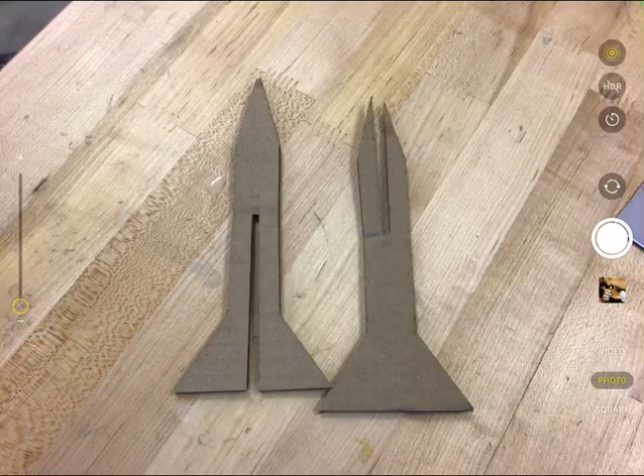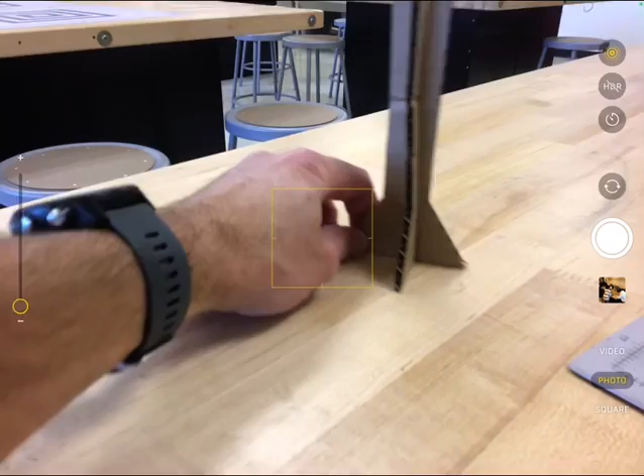All right, we are going to make these rocket pieces that fit together like so. Let's see if I can hold this up. The two pieces, so the slot on one stops where the slot on the other begins. And they insert together. So this is a technique just to help you learn how to create slotted pieces that connect together. So here we go.

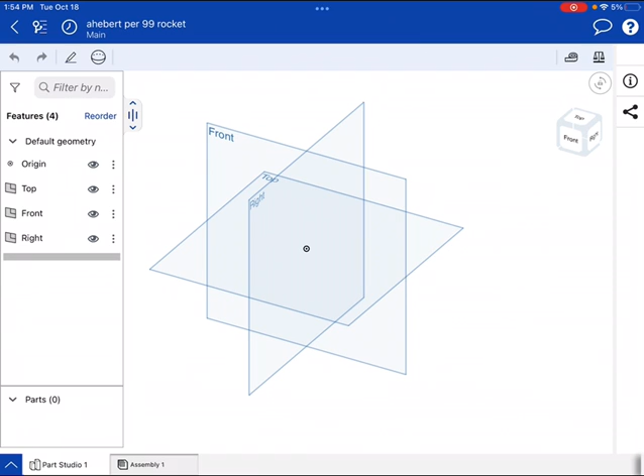All right, I'm gonna create a file. Always put your name first and last, period, and then the name of the file, rocket. I'm gonna start by sketching on the front plane with the line tool. Now, I'm gonna do something to make your life a little easier. Right next to the line tool, I'm toggling on and off the dashed line. So press and hold, watch what happens.

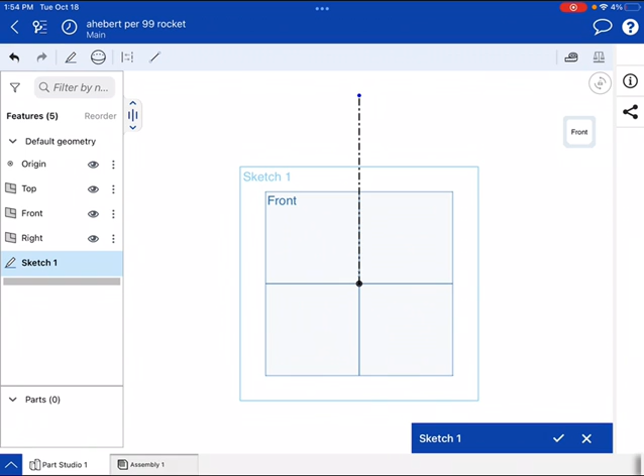I'm gonna snap to the center and go straight up. And I get a dashed line, all right? So it's exactly the same thing as drawing a line, but you turn on this little dashed symbol. All right, now nothing is on. So turn off your line tool, turn it back on, and now we're gonna draw the rocket.

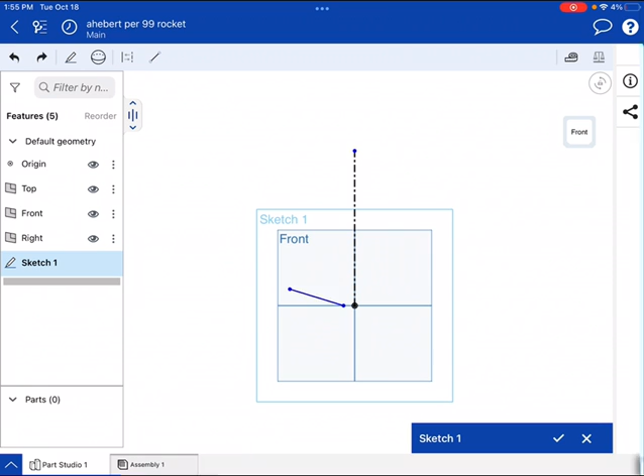But I'm going to start by drawing the rocket with like a gap in the middle. No, let's not do that. Let's actually undo what we just did. Let's turn on the line tool and let's just draw the rocket. So here we go. Now when you draw it, you don't need to worry about it being perfect, but you want it to be approximately correct.

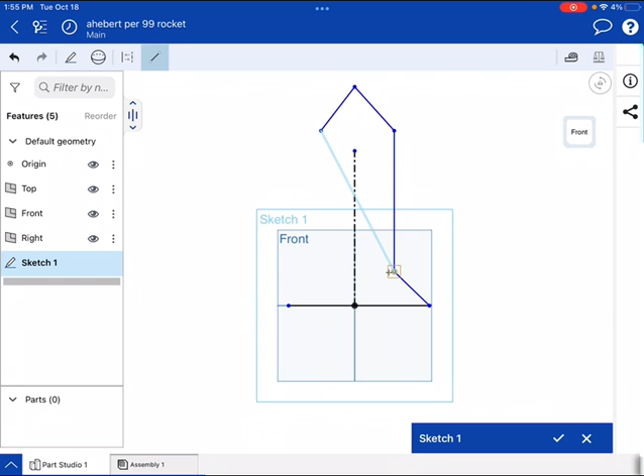All right, now this helps. Look at this, snapping to the middle. That's going to help me not have to dimension that middle point right there. Snapping across here will help me as well, not have to use the horizontal line tool. Snapping across here, if I connect those and drag across, they're already horizontally aligned. And there you go. Now we have to create that slit, right?

Be careful, if the line tool is still on, it's going to want to start drawing from where I left off. Oh, maybe not. Well, anyway, turn on the line tool. I'm going to press and hold, and I'm going to come down here, and I'm going to draw. Oh, look at that, it snapped to the middle. I don't want that. So let's zoom in a lot. Turn on my line tool, press and hold. We don't want it to snap to the middle because we want to draw a slit that straddles the middle, okay? So you're gonna draw it like so.

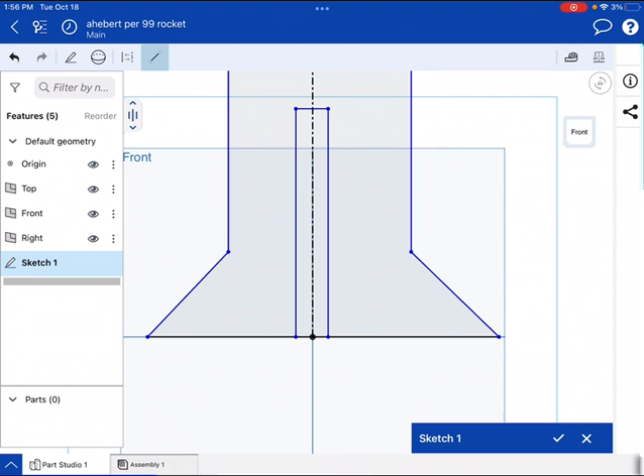There you go. Now I'm gonna turn off my line tool and grab the trim tool, zoom in, press and hold, and delete those little lines. All right, perfect. So we're pretty good to go. If you missed that part when I was using the points to snap to each other, make sure these are horizontally aligned right here. Make sure this point and this point are horizontally aligned.

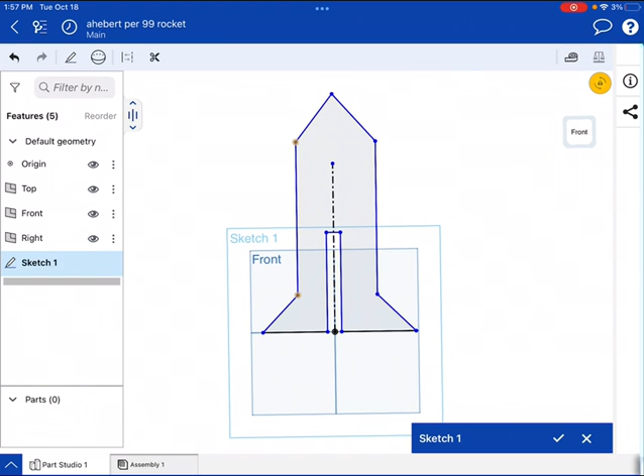And if you didn't draw it straight up and down, make sure these points are vertically aligned, right, on both sides of your rocket. So step one is to draw the shape approximately correct. Step two is to horizontally and vertically align your points. You can also test by dragging. These 2 points are moving together vertically, which means they are horizontally aligned. So you can always test it too.

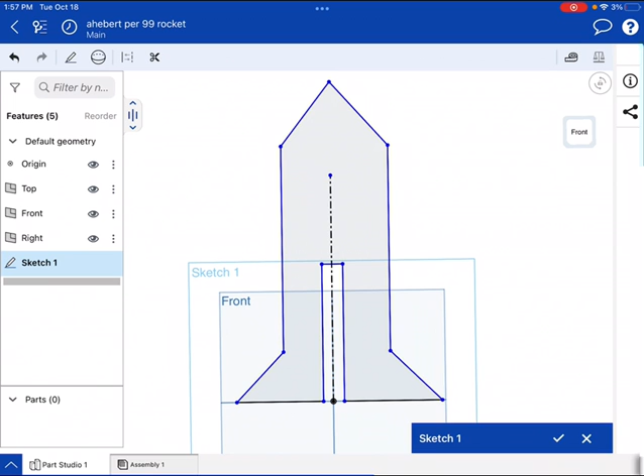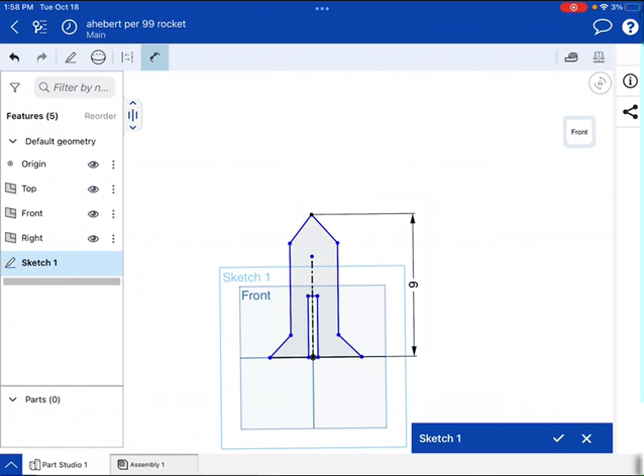All right, so sketch the shape, vertically and horizontally align any points, and then put on your largest dimension. I'm gonna go top to bottom. Now that's diagonal. Put your finger on the number, drag it out until it becomes a vertical dimension. I'm just gonna use 6 inches, check. And that'll shrink everything down. I'm gonna turn off my dimension tool and just zoom in a little bit. All right.

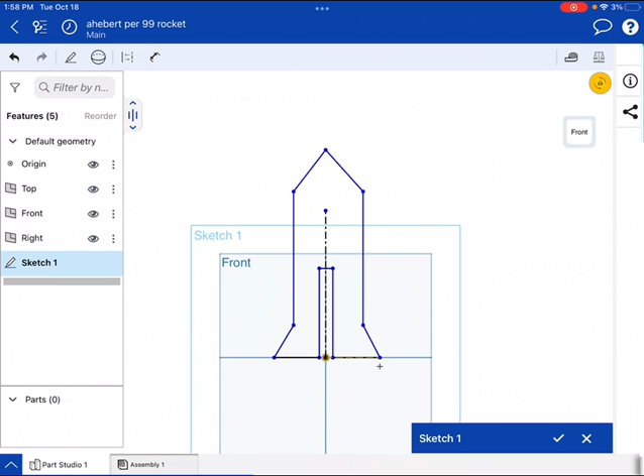If by any chance the tip of your rocket doesn't look like it's in the center, this is what you should do. You should dimension the full width, whatever number you want. I'll use 3 inches, okay? Now that looks really goofy. Looks really goofy, all right? But I should be able to still move things around. There's not a lot of dimensions, right? So I can still move this around till it looks kind of symmetrical. I'll put dimensions on to guarantee it.

So watch this. I turn on my dimension tool, I press and hold, I go from the corner to that line of symmetry right here. And that should be exactly half of 3, okay? Make sure that the tip of your rocket is vertically aligned with the end of that dashed line. They should be vertically aligned. So I'll hit vertical, although I think mine already were vertically aligned. Okay, so that line of symmetry is going to help a lot.

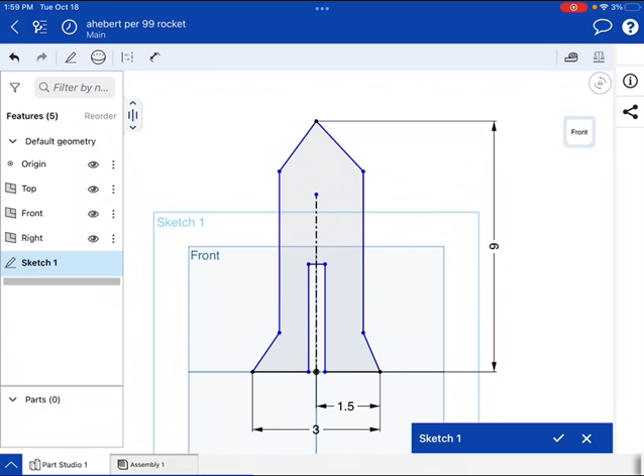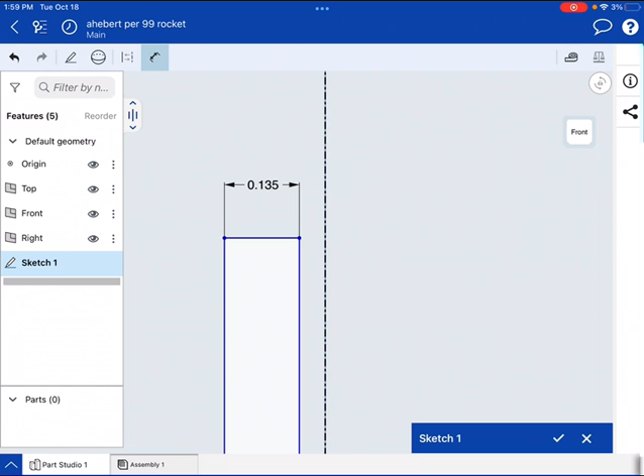Now, the full width of this slot right here, if I just tap on that line, if I select it, the full width of this is only 0.135, 135 thousandths of an inch. That's the thickness of cardboard. But I want it to be symmetrical about that line. I'm going to turn off my tool. You can actually move the line if you tap it and drag it. Some of you might have trouble doing that just because of the sensitivity of your screen. Okay, you might have to delete the lines and redraw them so that they go across the top.

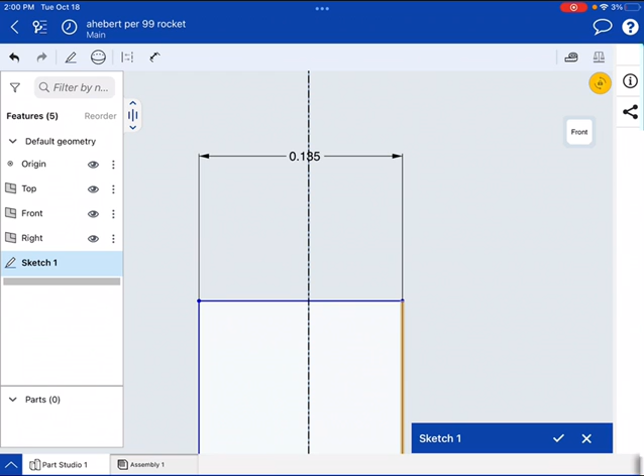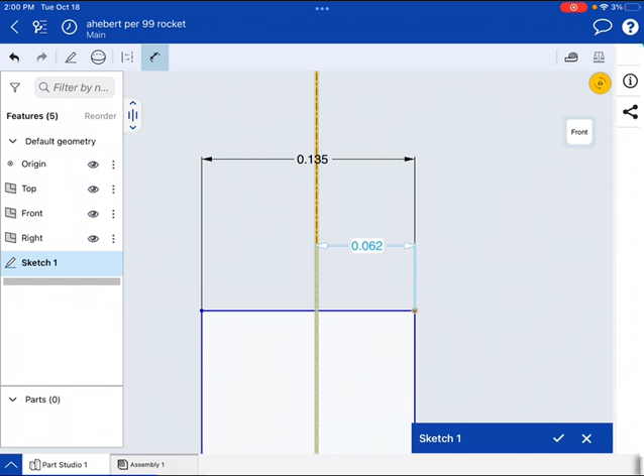But we want it to be symmetrical. To be symmetrical, we turn on our dimension tool and we say, hey, we need the dimension from this corner to this line. Where did the dimension go? It should be there somewhere. There it is. I'm going to put my finger on here and I'm zooming in. What should this number be? Well, it should be exactly half of 0.135. So you can use the keyboard and type in 0.135 divided by 2, and look at that. It makes it symmetrical. And then you just go about your business putting on the rest of the dimensions, but try to make it symmetrical.

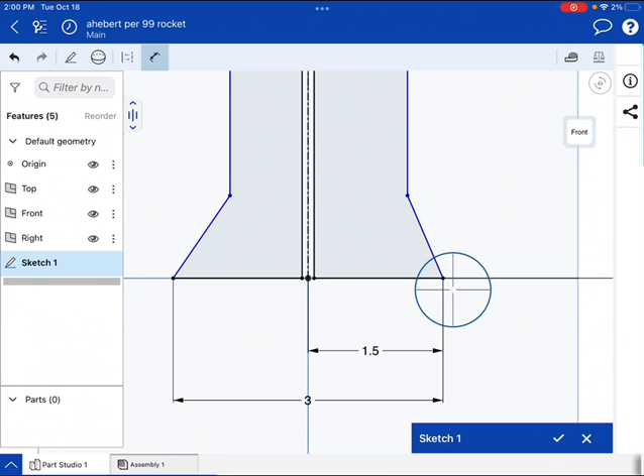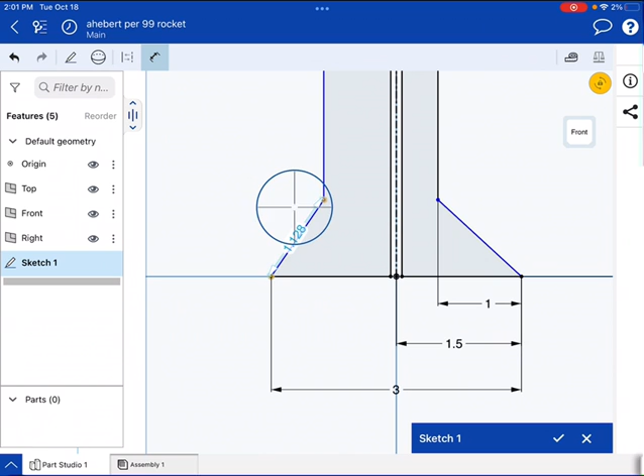Now, if you don't want to follow all the dimensioning rules for now, you don't have to. For example, if I put this dimension in, then I say, the distance from this side, if I make this, say, 1 inch, then I need to make sure the other one is also 1 inch. So go ahead and break all the rules. I'm not using a common reference point. Put your finger on the number. At this point, you want to drag straight down, right? And I make this 1 inch as well. I just want symmetry. So yes, I am breaking the rules of using a common reference point, but we can delete these lines and put it on properly later, right?

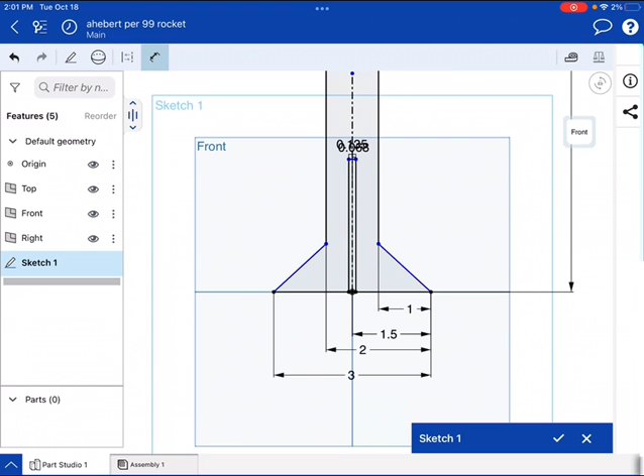I could double tap the number, delete it, and now I could put it on properly using the right side to this point, and I could put on this number like that. Now I'm using a common reference point. But notice I kind of, not cheated, but I didn't use a common reference point at first just to make sure it was symmetrical. All right, so I would say establishing that line of symmetry is key. After that, go ahead and put on any dimensions you want. It doesn't really matter what the size is. Don't have any diagonal dimensions. So as long as it looks good to you, it's fine.

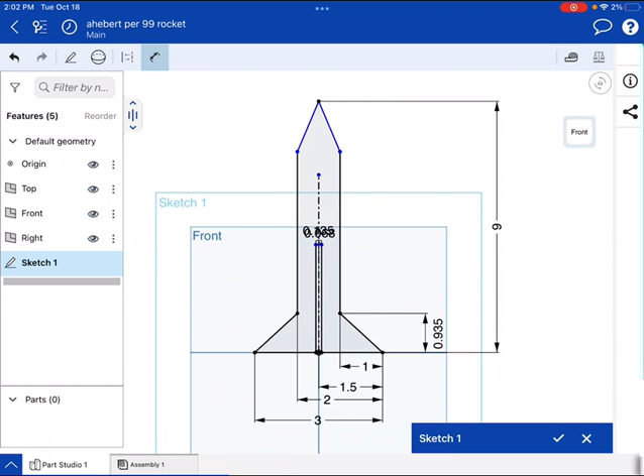A very important number is the height of the slot, right? None of these dimensions really matter as long as it looks good, but the height of the slot does matter, right?

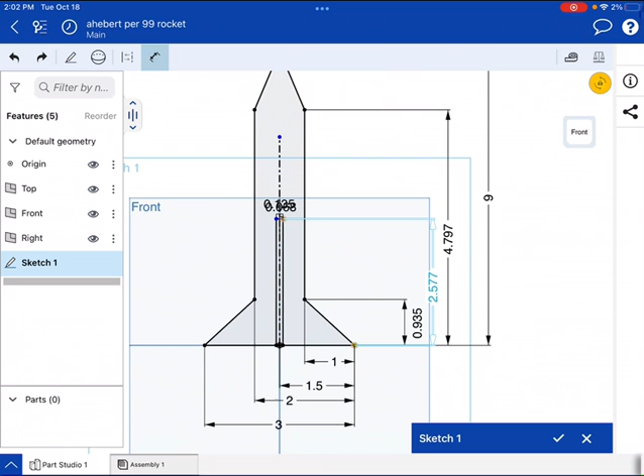How far does this extend? Well, it should be exactly half of the design. Whoa! I'm going to undo what I just did. Okay, so let's put on the dimension from the very bottom to the corner of that. I didn't grab it. Let's try that again. There we go. Again, don't make it diagonal. Drag it out. And it should be exactly half of the full height. My full height was 9. So I'll make that 4.5, or 9 divided by 2.

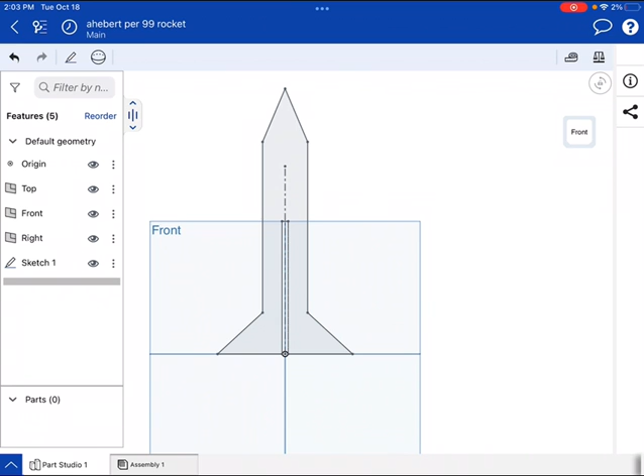Oh, that's a 6. Sorry, I'm looking at it upside down, I guess. So let's try that again. Half of 6 is 3. There you go. Check. So that's part 1. Then we have to do the top of the rocket. All right.

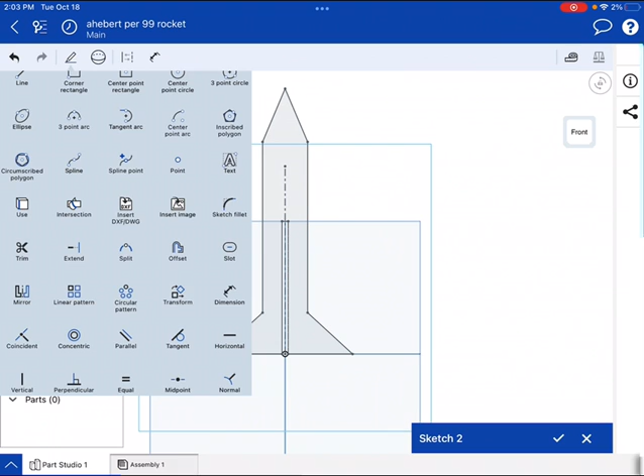For the top of the rocket, I'm going to show you a trick here. I could copy this sketch, start a new sketch, all right, on the front plane, and then I hit the check mark. And right now it's blank. There's nothing in Sketch 2, right? If I turn off Sketch 1's visibility, I got nothing in Sketch 2, but if I click the 3 dots, I can hit paste into Sketch. So I just copied and pasted. Now I've got something to work with. It's just like the other piece.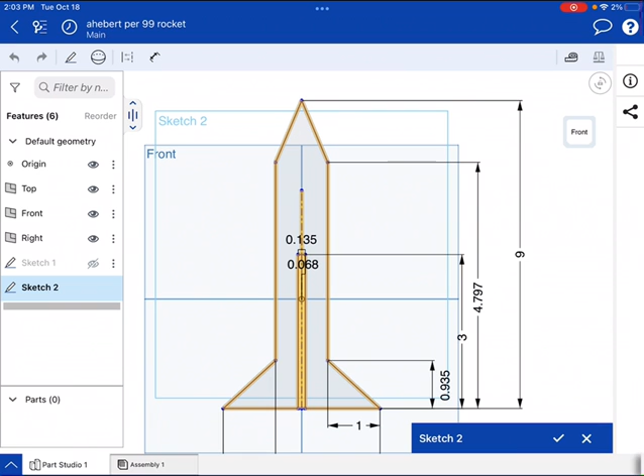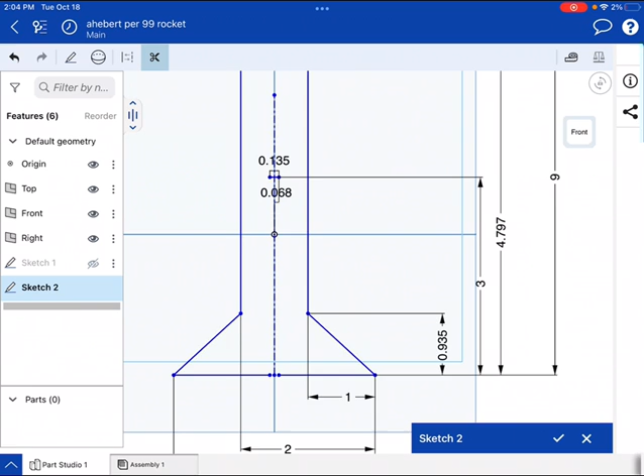I'm going to edit it. I got all my dimensions, but I need to change some of the lines up. So what I could do, double tap in the white space, I could delete some lines. I'll trim, right? Because I want the slot to be opposite of this one. So I'm going to delete this one, delete this one. I'm going to leave that line there where the 2 slots will meet. I'm going to fill in the gap. Oh, let me show you how to fill in the gap.

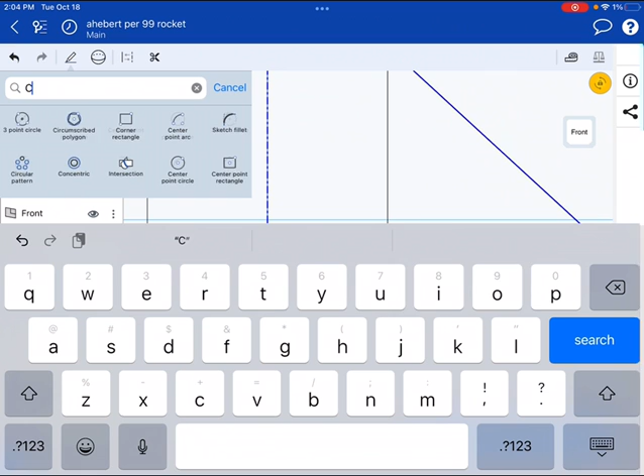Here we go. If I just tap these 2 points, I can go to my tools and hit coincident. It's near the top, I think. Coincident. Oh, so I saw a student show me the search, C-O-I, coincident. There it is. And then the points will connect. They'll be brought together.

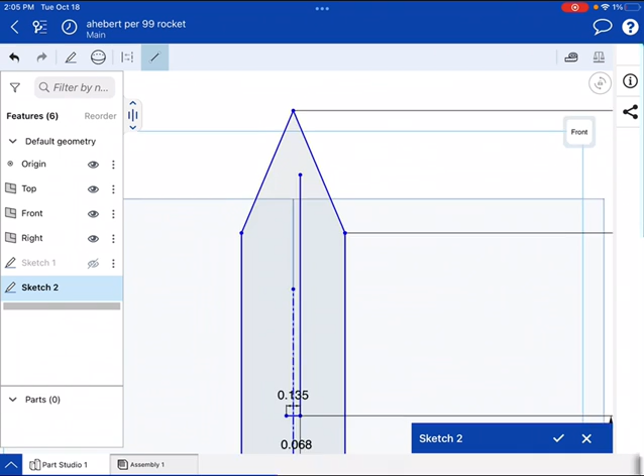Now I need to finish the slot at the top. So I turn on my line tool, press and hold, and I'm going to go straight up from here. I'm kind of running out of space. I'm going to drag that line. Whoa! Look at that. It's offset. That's not good. I'm going to leave it offset on purpose just to show you how to fix it. So we need a dimension. These dimensions are not working for us right here unless we could get that dashed line to line up with the center. How do we do that?

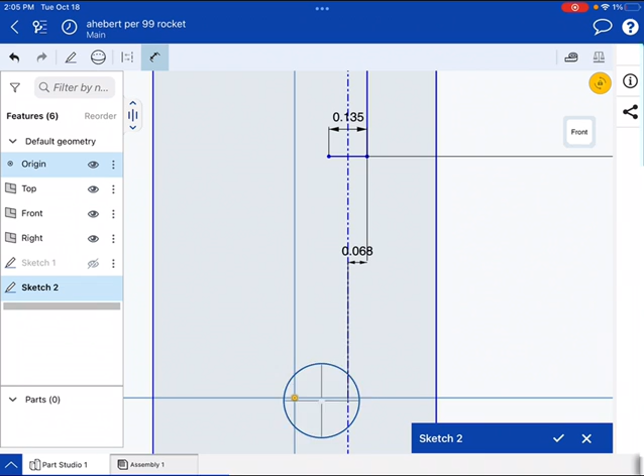Well, check this out. Here's a trick. Turn on your dimension tool and say, hey, here's the center. Here's my dashed line. I want that dimension to be 0. Right now it's offset a little bit. I can actually change that to 0 and it brings it back together. That's a little trick. And now it's centered again.

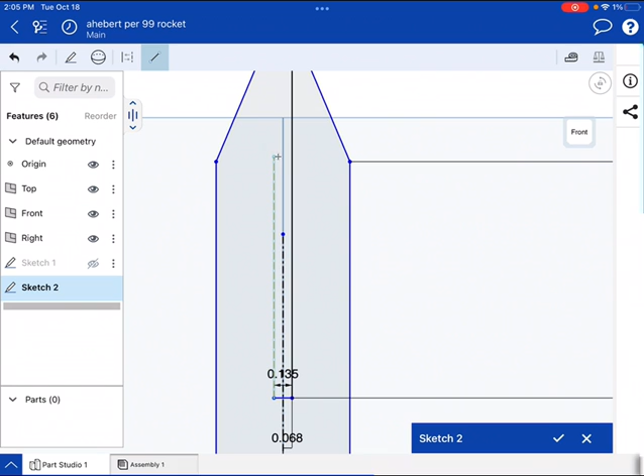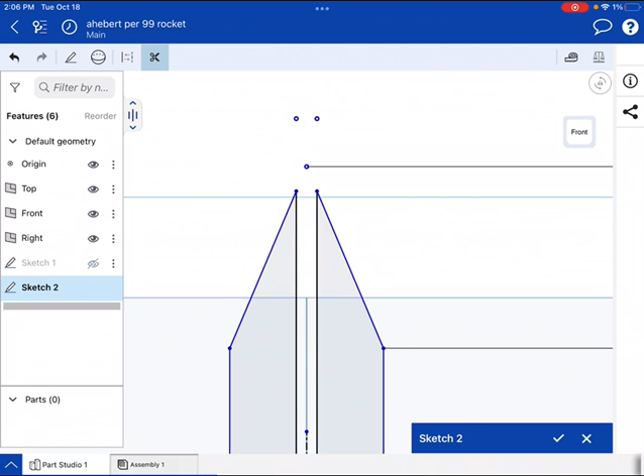Turn on my line tool, press and hold, go straight up. I'm going to tap that point and drag it out a little bit. And now I can use my trim tool to delete the extra lines that I don't need. There you go. And then this piece should fit together perfectly with the other rocket. If you're not sure, you can always assemble them. You can create an assembly, and then they should fit together.

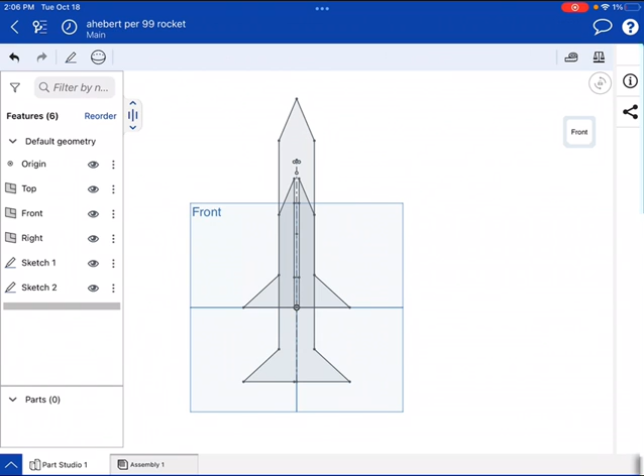Let's do that just for kicks. Let's hit check. Sketch 1. Oh, I'd have to move them. Well, that's a lot of work on an iPad. We'll do that for another day. We'll just go ahead and laser cut these and they should fit together.

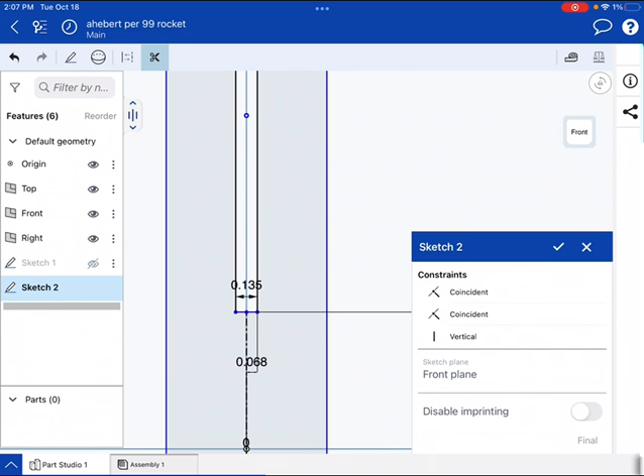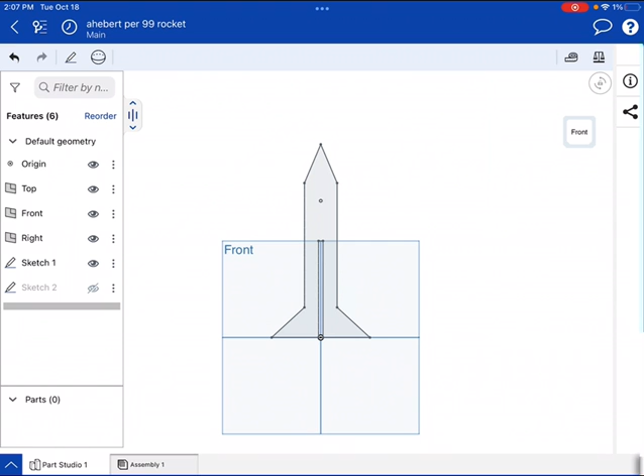Oh, before you laser cut though, you want to delete the dashed line. So turn on your trim tool, make sure you delete the dashed line because the laser will cut that line. We needed it, but now we're done with it. So let's go back into both sketches and make sure you get rid of that dashed line because the laser will cut it. Check. All right, so there's sketch 1, and there's sketch 2, and they should fit together precisely.